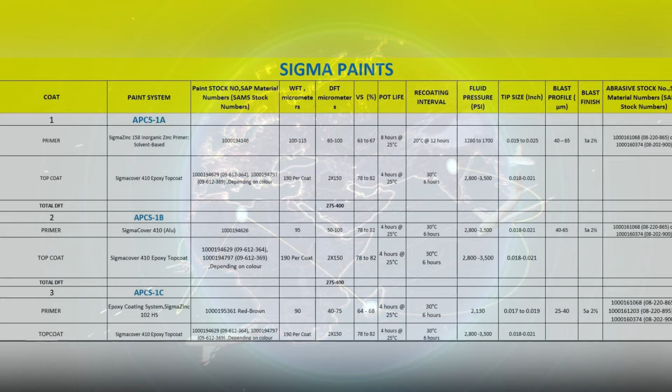Sigma Paints, PPG protective coatings, concentrate on development of high-quality products which solve problems for customers and/or provide distinctive benefit. They have global operations covering all continents in 70 countries, and their products and systems are supported by the

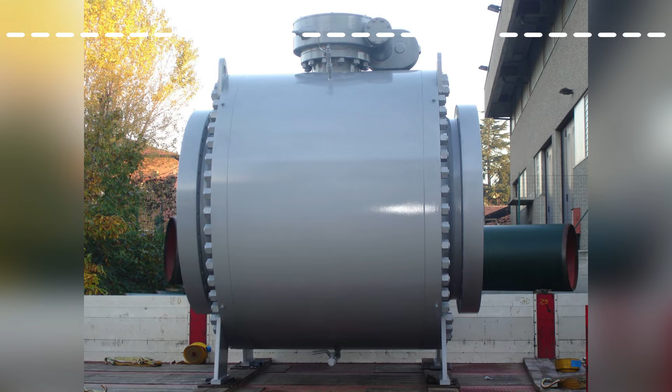best customer service standard in the business. They offer best-in-class products for marine infrastructure, chemical processing, power, oil and gas, offshore, and rail industry segments.

Today we are going to discuss the Aramco Protective Coating System with respect to Sigma Paints.

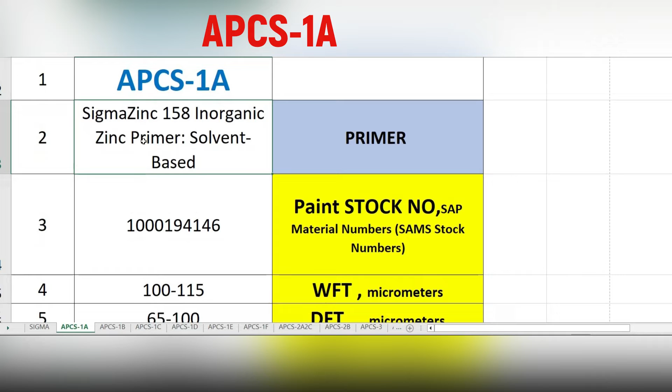The first one, APCS 1A. The type of coating: epoxy coating system for atmospheric services with inorganic zinc primer.

Typical usage: severe atmospheric exposure, particularly for offshore construction, not generally specified for maintenance painting. Service condition limitations: maximum service temperature 150 degrees Celsius.

The primer paint from Sigma is Zinc 158, inorganic zinc primer, solvent based. Paint stock numbers.

WFT in microns 100 to 115, DFT 65 to 100, volume solid 63 to 67%. Pot life 8 hours at 25 degrees Celsius. Recoating interval at 20 degrees, 12 hours.

Fluid pressure recommended 1280 to 1700 psi. Tip size in thou 19 to 25. Blast profile in micrometer 40 to 65. Blast finish.

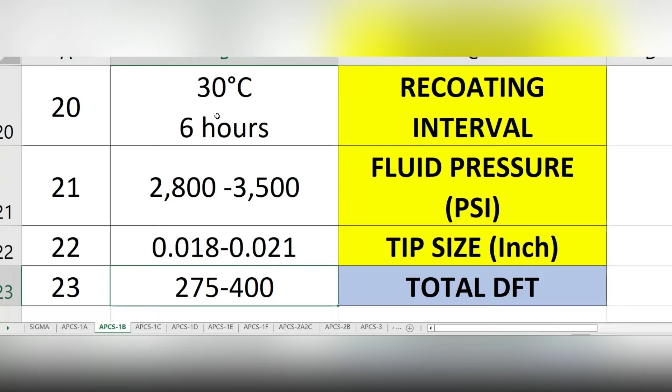Coating system for atmospheric service.

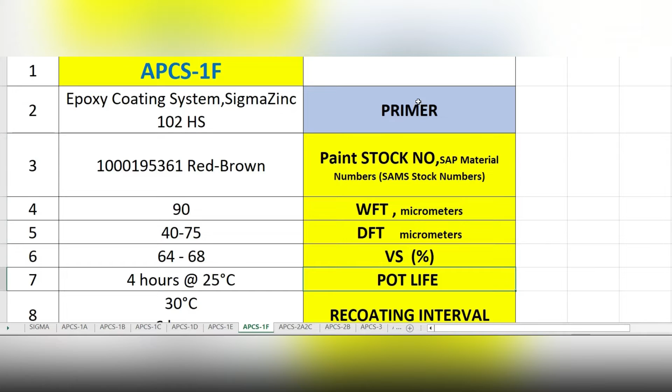Paint stock number, WFT recommended 90 micrometer to get DFT of 40 to 75 micrometer. Volume solid of this paint 64 to 68%.

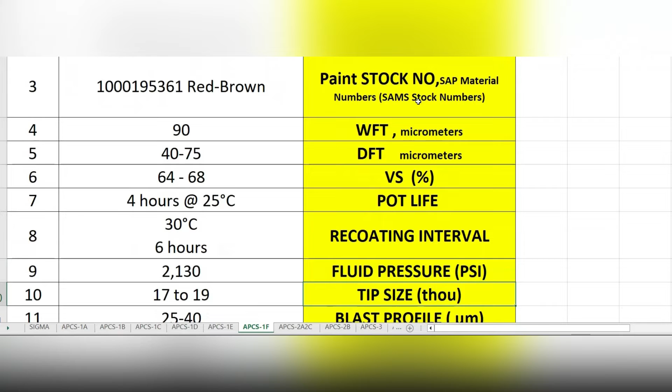Pot life of this paint 4 hours at 25 degrees Celsius. Recoating interval at 30 degrees, 6 hours.

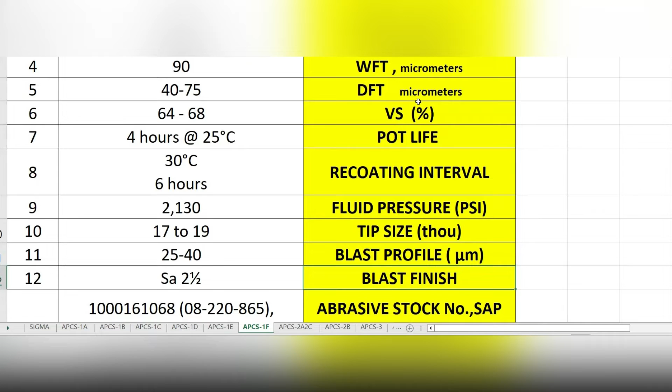Fluid pressure recommended 2130, 17 to 19 thou will be the tip size. Blast profile recommended 25 to 40 micrometer. Blast finish SA2.5. Abrasive stock numbers.

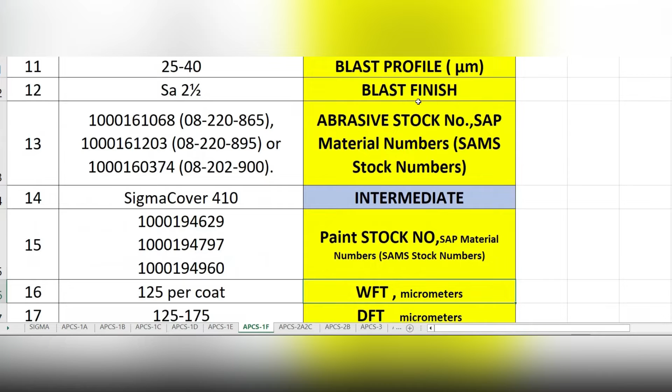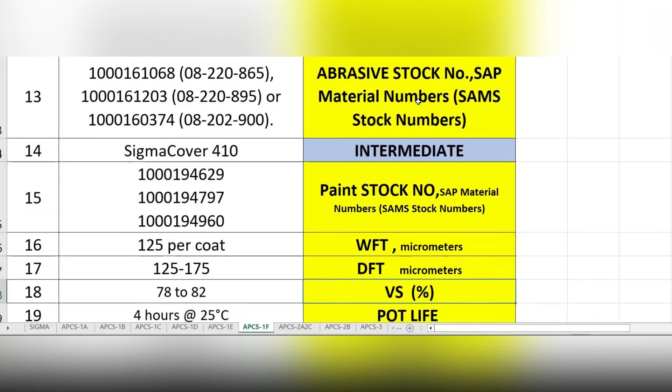Then intermediate coat for this APCS 1F will be SigmaCover 410. Paint stock number, WFT will be 125 per coat. DFT 125 to 175 micrometer.

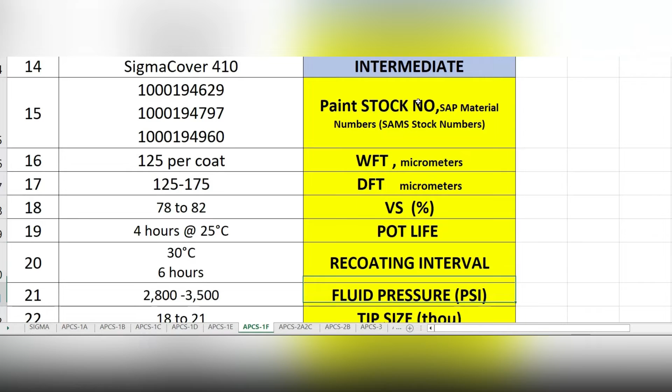Volume solid for SigmaCover 410 is 78 to 82%. Pot life for SigmaCover 410, 4 hours at 25 degrees Celsius. Recoating interval at 30 degrees, 6 hours.

Fluid pressure 2800 to 3500 psi. Tip size 18 to 21 thou. Top coat: SigmaDur Gloss.

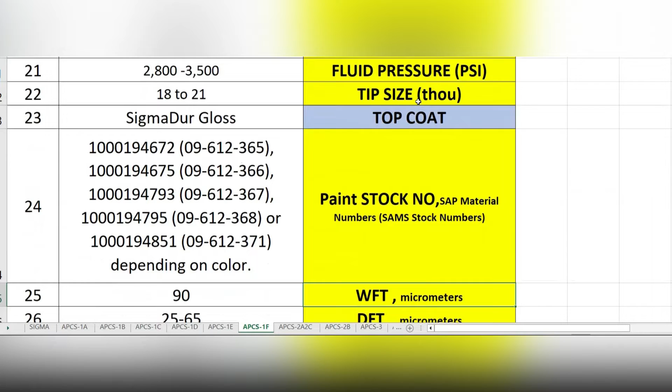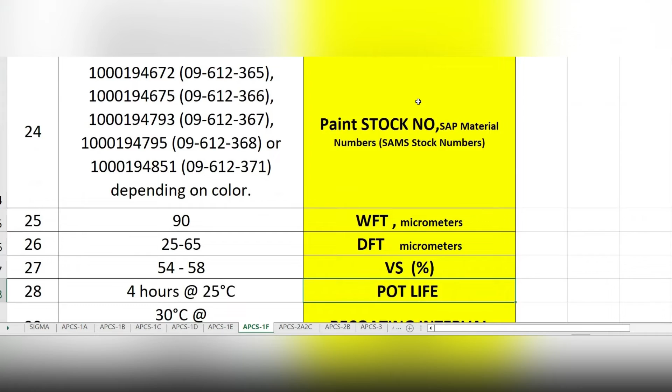Paint stock number. WFT 90 microns, DFT 25 to 65 micron. Volume solid of SigmaDur Gloss 54 to 58%. Pot life for SigmaDur Gloss, 4 hours at 25 degrees Celsius.

Recoating interval at 30 degrees, 5 hours. Fluid pressure recommended for SigmaDur Gloss 2800 psi. 11 to 13 will be the tip size. Total DFT for APCS 1F, 190 to 315 micrometer.

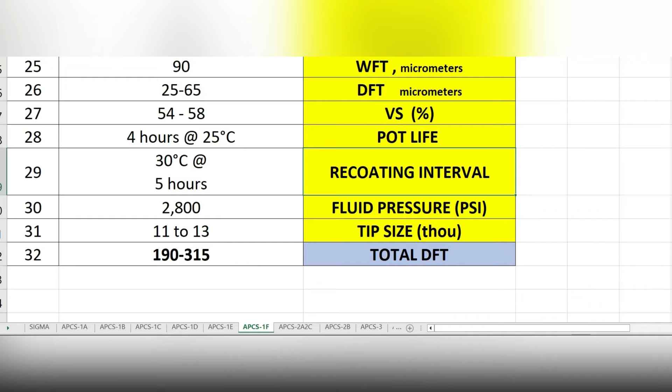APCS 2A: phenolic epoxy coating system for immersion services, self-priming. Typical use: immersion service particularly for raw or treated waters and for GOSP traps handling hot crude oil and brine solutions. Not suitable for potable water.

Maximum service temperature 90 degrees Celsius. APCS 2A and 2C.

Primer, intermediate, top coat from Sigma Paint. The paint products are Sigma Phenguard 930, Sigma Phenguard 935, Sigma Phenguard 940 respectively.

Paint stock, WFT 150 per coat, DFT 3 into 125 micron. Volume solid for these paints 66 plus or minus 2%. Pot life 3 hours at 25 degrees Celsius.

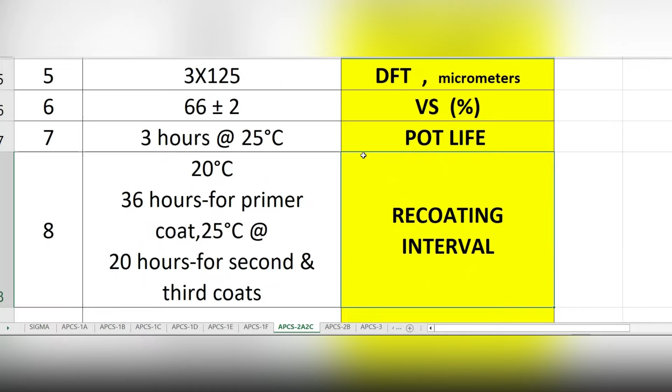Recoating interval. Fluid pressure 2130 psi. 18 to 25 tip size in thou.

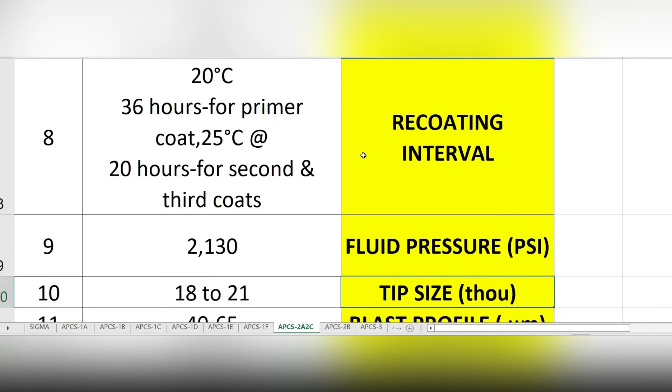Blast profile 40 to 65 micrometer. Blast finish recommended SA3. Abrasive stock numbers, 275 to 375 micrometer is the top coat.

Total DFT. APCS 2B: epoxy coating system for potable water immersion services, self-priming. Typical use: immersion service for potable water application. Maximum service temperature 90 degrees Celsius.

For APCS 2B, primer and top coat from Sigma Paints is Sigma Phenguard 930, Sigma Phenguard 940 respectively. Paint stock numbers, WFT 150 per coat, DFT 125 micron for each coat.

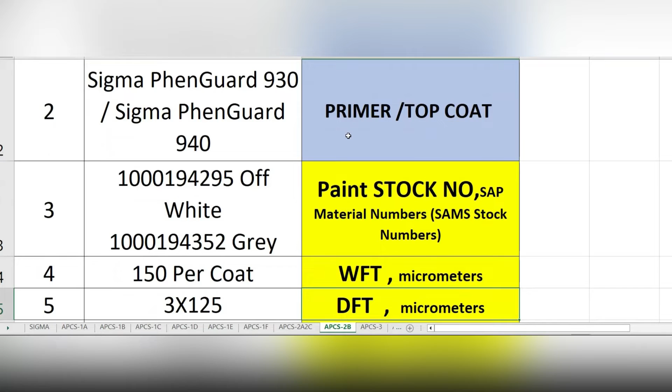Volume solid 66 plus or minus 2%. Pot life 3 hours at 25 degrees Celsius. Recoating interval. Fluid pressure 2130 psi.

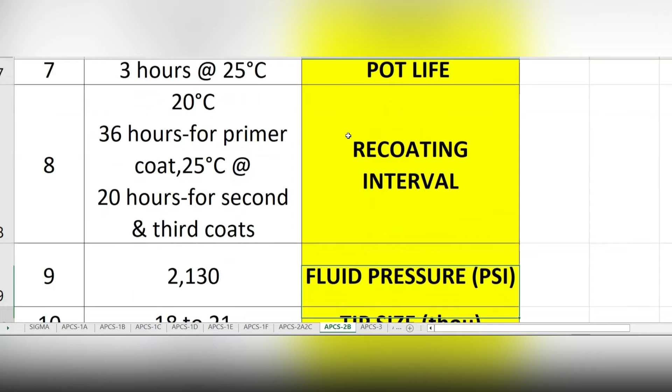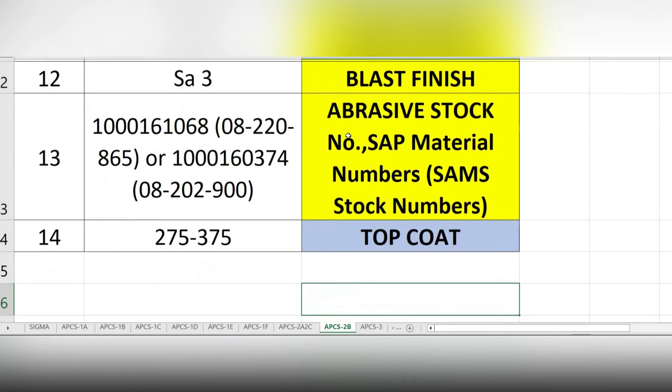18 to 21 tip size. 40 to 65 blast profile in micrometer. SA3 blast finish is recommended. Abrasive stock. Top coat DFT will be 275 to 375 micrometer.

APCS 2C: epoxy coating system for immersion services at temperature up to 120 degrees Celsius. Typical use: immersion service for demineralized water and boiler skim tanks. Maximum service temperature 120 degrees Celsius.

APCS 3: coal tar epoxy coating system for immersion services and buried steel and concrete. Typical use: immersion service in tanks containing hydrocarbons, seawater, fresh water, and most alkalis. Intermittent contact with acids and solvents.

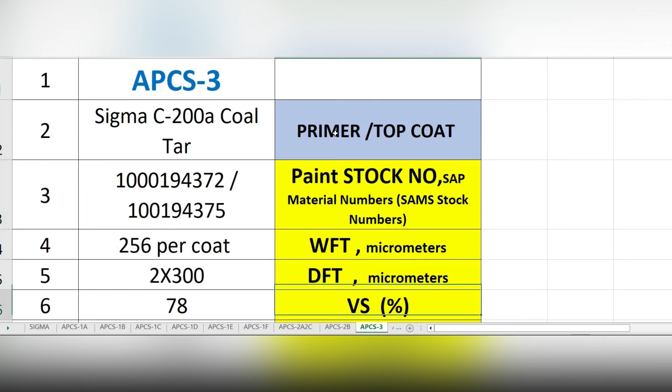It's also for buried concrete foundations and oily water concrete sumps. Maximum service temperature for immersion: 70 degrees Celsius. For APCS 3, the product from Sigma is C200A coal tar.

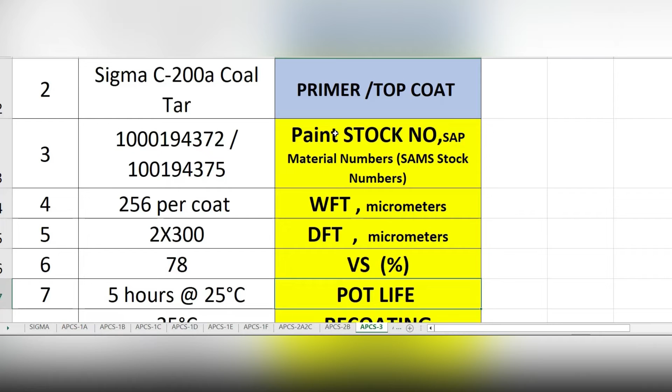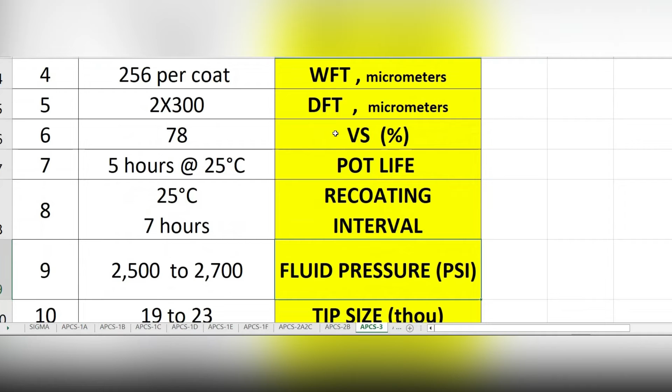Primer stock, WFT, DFT. Volume solid for this paint is 78%. Pot life is 5 hours at 25 degrees Celsius. Recoating interval, fluid pressure 2500 to 2700 psi. Tip size recommended 19 to 23 thou.

Blast profile 65 to 100. Blast finish recommended SA 2.5. Abrasive stock numbers. Total DFT recommended 400 to 600 for APCS 3.

APCS 4, Aluminum Pigmented Alkyd Coating System. Typical use: structural steelwork, tanks, vessels, pipes and equipment subject to moderate industrial atmosphere including H2S fumes and high humidity. Not generally recommended for shop application or when handling is required after coating. Maximum service temperature 80 degrees Celsius.

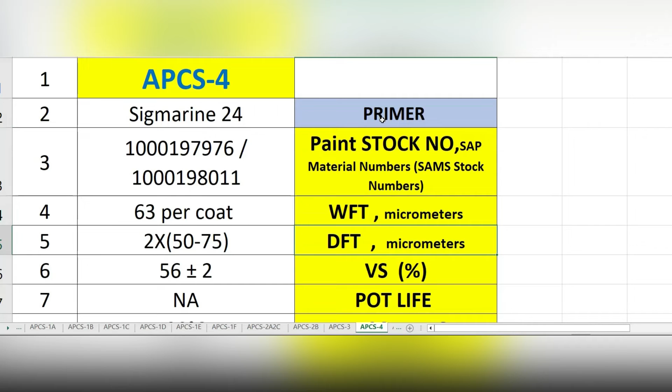For APCS 4, Sigma is providing Sigmarine 24 as a primer. Paint stock number. WFT recommended is 63 per coat. DFT 50 to 75. Volume solid of this Sigmarine 24 will be 56 plus or minus 2%. Pot life not applicable. Recoating interval. Fluid pressure 1700 to 2130 psi. Tip size recommended 0.017 to 0.019 inch.

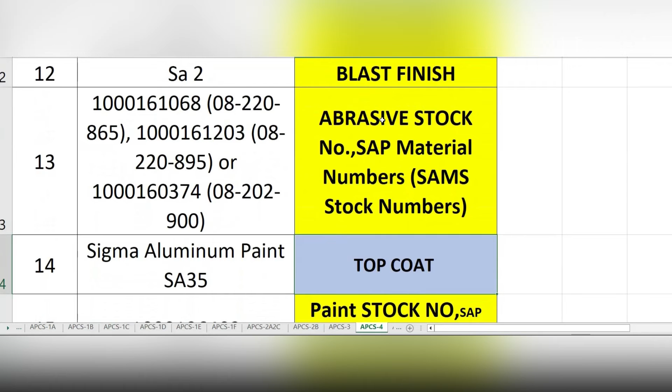40 to 65 blast profile is recommended. Blasting finish SA2. Abrasive stock. Top coat: Sigma aluminum paint SA35. Paint stock WFT 65. DFT 40.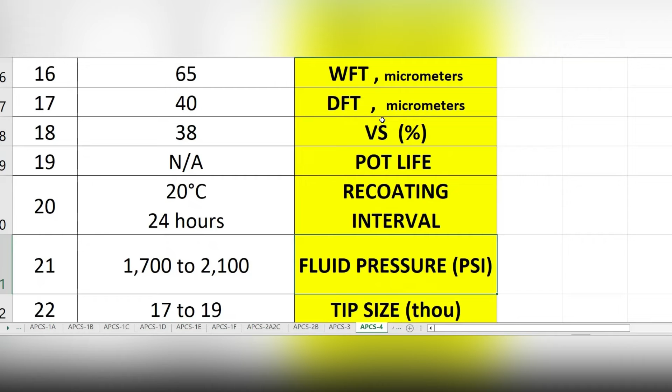38% volume solid for Sigma aluminum paint. Recoating interval. Fluid pressure recommended 1700 to 2100 psi. 17 to 19 thou tip size is recommended. Total DFT 115 to 180 micrometer.

APCS 6, Alkyd enamel coating system. Typical use: structural steel, machinery and equipment in marine and industrial environment including intermittent exposure to H2S fumes and high humidity. Not recommended for shop application or when handling is required after coating. Maximum service temperature 70 degrees Celsius.

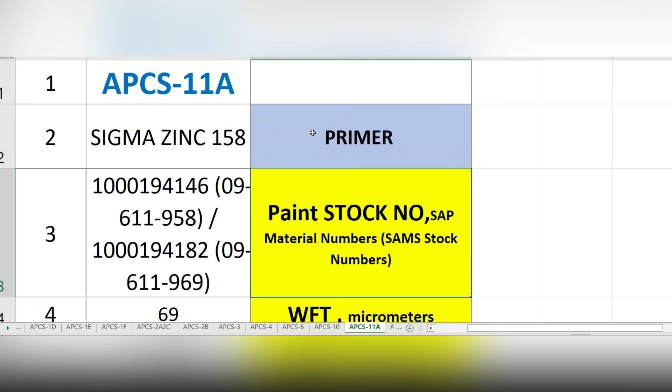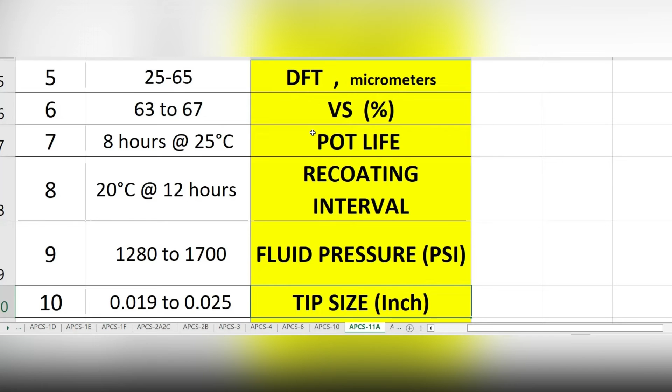Paint stock, WFT, DFT, volume solid, pot life, recoating interval, fluid pressure, tip size, blast profile, blast finish, abrasive stocks, as discussed before.

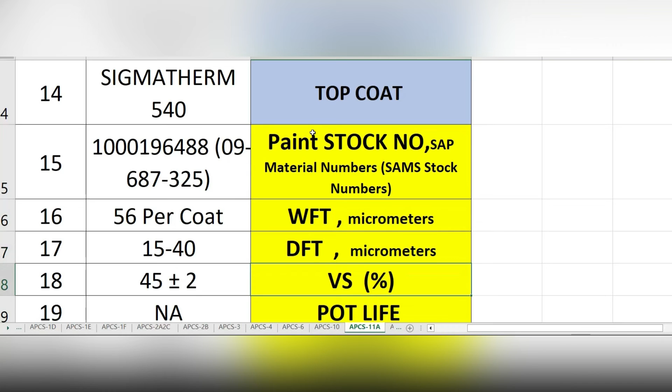Top coat, Sigma Therm 540, paint stock number, WFT 56 per coat, DFT 15 to 40, volume solid 45 plus or minus 2%, recoating interval 20 degree at 24 hours, nozzle pressure 43 to 57 psi, nozzle size 1.5 to 2 mm.

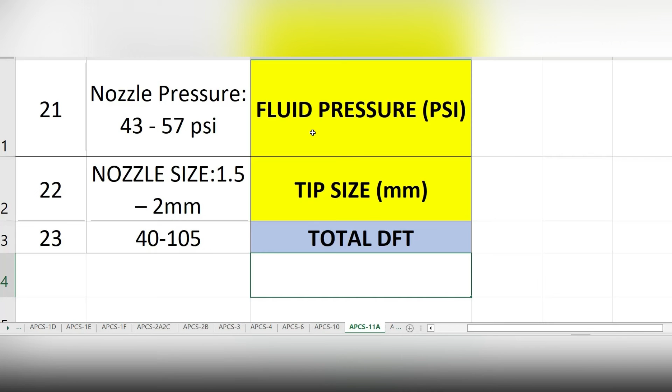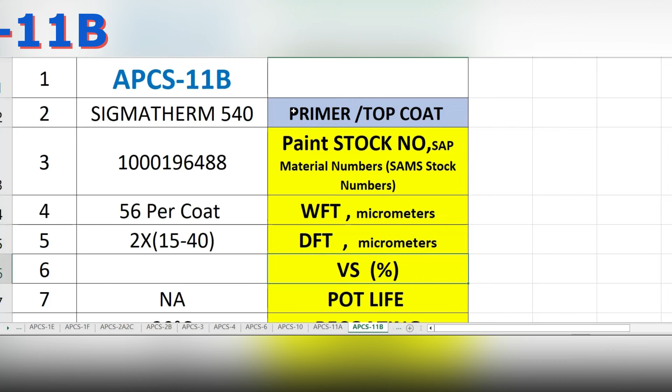Total DFT 40 to 105. APCS 11B, very high temperature coating system for atmospheric services between 400 and 540 degrees Celsius. Typical use: steel in atmospheric services at elevated temperature. APCS 11B, paint product is Sigma Therm 540. All details same as top coat for APCS 11A.

Next paint system, APCS 22A. Epoxy coating for application onto damp steel surfaces. Two-coat system. Typical use: offshore steel structure in above water areas. Can be applied in conditions of high humidity to a slightly damp substrate. Primer product for APCS 22A is Sigma Cover 410.

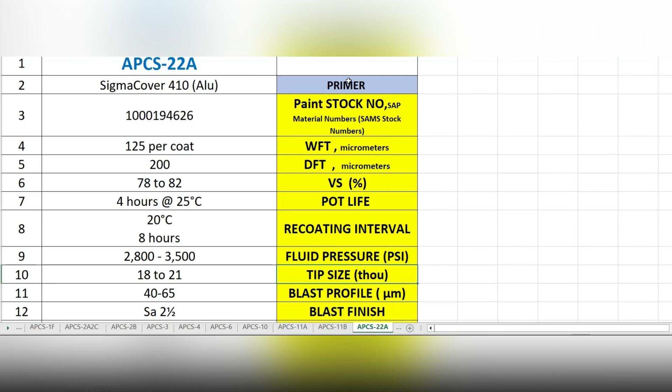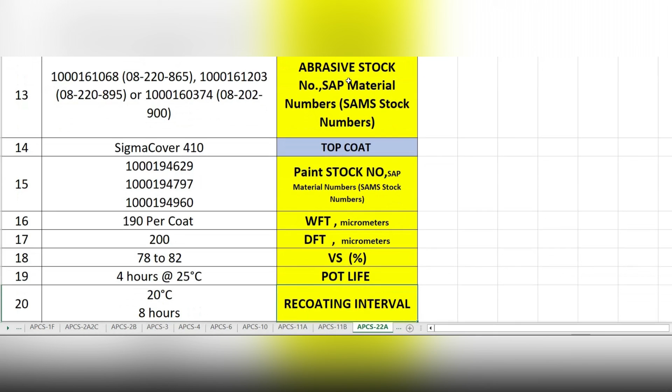Paint stock number, DFT, WFT, volume solid, pot life, and all these details as discussed before. Top coat, same paint, Sigma Cover 410. Total DFT recommended 300 to 400 micrometer.

APCS 26, epoxy mastic coating system with self-priming. Typical use: one coat for coating maintenance work, fast dry alternative to APCS 4 and APCS 6. A coating for galvanized steels and aluminum for appearance or increased chemical resistance. A maintenance coating over existing sound coatings for new steel structure in mild corrosive areas. Maximum service temperature 120 degrees Celsius.

Paint product for APCS 26 from Sigma. Primer paint is Sigma Cover 410 and top coat also Sigma Cover 410. Total DFT is 300 to 400 micrometer.

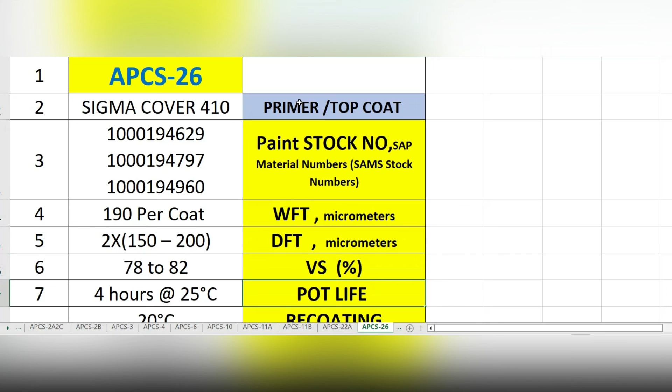Next paint system, APCS 26. Epoxy mastic polyurethane coating system for use outdoor when added gloss retention, color retention and abrasion resistance are required. Typical use: a fast dry alternative to APCS 4 and APCS 6. A coating for galvanized steels and aluminum for appearance or increased chemical resistance. A maintenance coating over existing sound coatings for new steel structures for dry onshore areas.

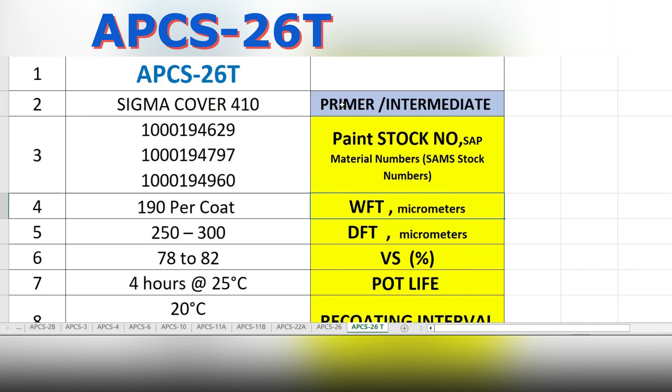Paint products for APCS 26T. Same as APCS 26, Sigma Cover 410 as primer and intermediate. Top coat is Sigma Dur Gloss. Total DFT will be 290 to 360 micrometer.